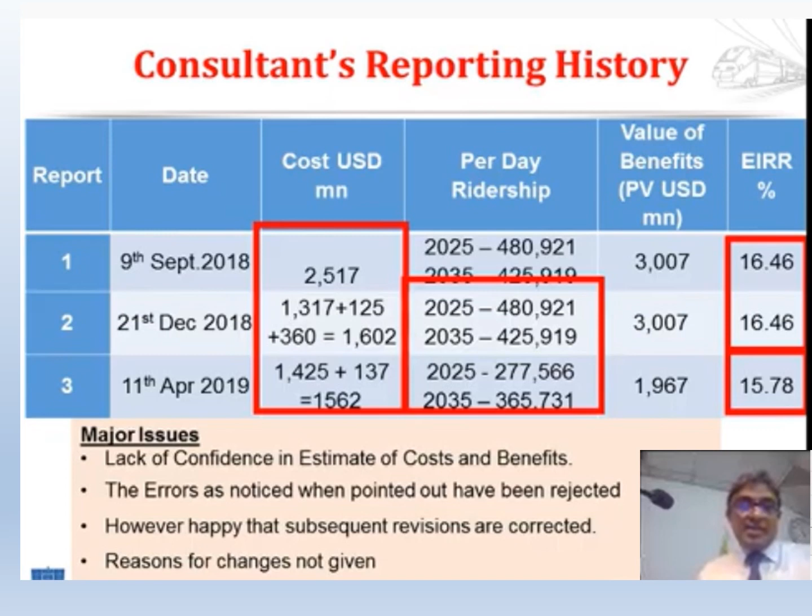The slides extracted from the PowerPoint presented at the seminar summarize the concerns by the IESL. First, they tried to show that there were 3 feasibility reports which kept on changing each time a question is asked. The speaker's intention was to show the misconduct by the consultants.

However, most of you who have been part of any projects or any study would know that the final report just doesn't come out at once. I have explained before the reasons for the 3 versions of the report and how it unfolded. These draft versions of the reports are usually produced in well-spaced time intervals, giving enough time for project units and the stakeholders to give their comments and to monitor the progress of the consultants.

First of all, there's only one official version of the feasibility report, approved by the ADB, PMU and the Ministry, and that is the report submitted on the 11th of April 2019.

Any of the other versions of the draft reports were only available for steering committee members, and reasons for any changes between the internal documents have been provided to the steering committee members.

It is unfortunate we are not speaking about the final report findings, but on the reasons for the numbers being changed in an internal document, and thereby making people confused. This is the very reason internal documents are not shared with the public.

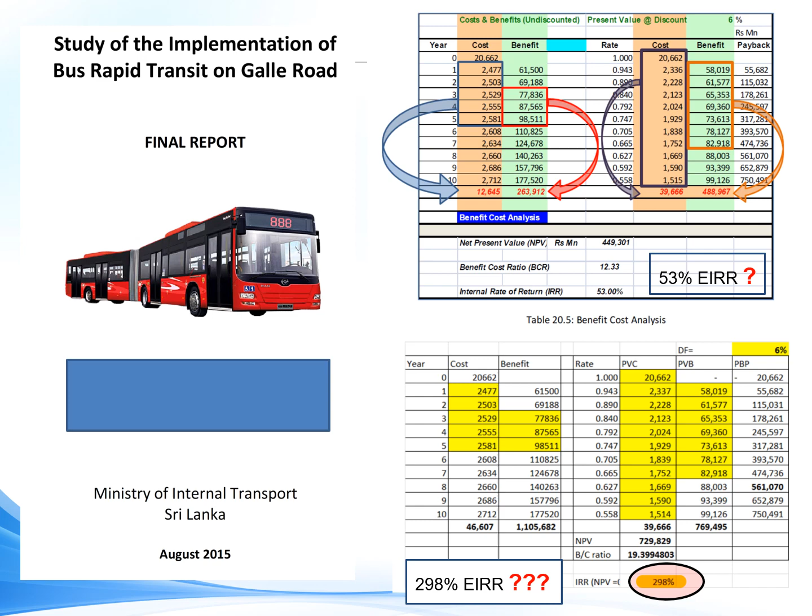It was disclosed that the estimated cost was 2.5 billion US dollars. As explained before, when ADB and PMU raised the question on cost being too high, the team leader explained that the cost was estimated based on international rates and he expects it to come down by 30 to 40% with detailed designs completed, and will be adjusted in the final report. He said this on 9th September 2018, the day the first draft report was submitted, not suddenly after one month or because of IESL's question, as misinterpreted by the presenter.

The cost was updated in the December 2018 report first, and finally in the final report on April 11, 2019. The estimated final cost was 1.4 billion US dollars, with a construction cost of 1.2 billion US dollars.

The reasons for the reduction, explained by the team leader, were twofold. First, it was due to refining of the initial cost, which was done based on international rates, using new local rates in detailed cost estimation, with optimization of structures like bridges, stations and track works, and due to change in rolling stock cost. Second, the previous cost was estimated in LKR and converted based on an exchange rate of 150 instead of 179.

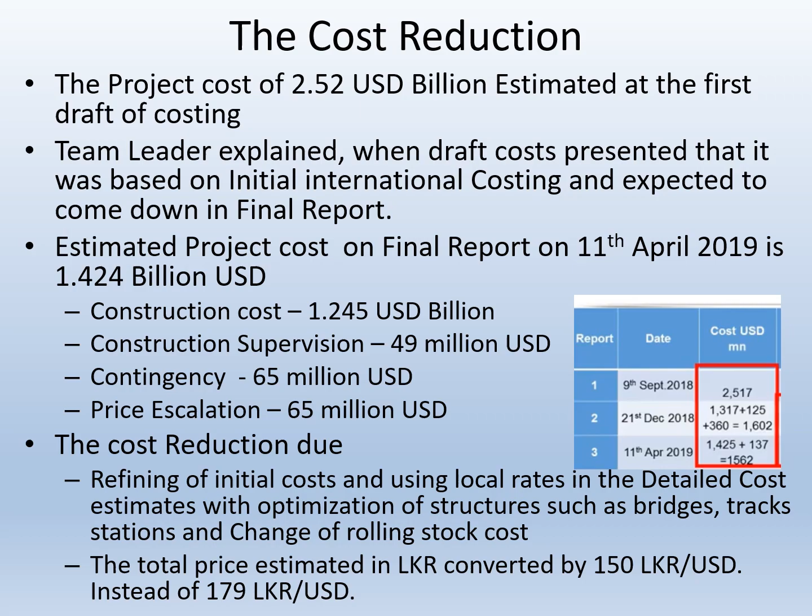So let's move on to the questions on demand analysis.

The presenter tries to show that the demand numbers have changed with no reasons given, and tries to add to the story as if the numbers are just made up. The basis for this accusation is that the demand numbers remain high in the so-called report 1 and report 2, and suddenly come down in report 3.

When we do the demand modeling, we don't do just one run. It goes through a thorough scientific process, and this is a technique that not many in Sri Lanka understand in depth, so I will explain it in detail a bit later.

Although we know what would happen now, what we don't know for sure is the future scenario. There can be many ifs and buts, and the demand numbers can change based on many combinations of assumptions you make. One such assumption is how you consider population growth for the future. A high growth will have more demand, and a medium growth in population will have lower demand. Later on, you would see that this change in demand numbers was based on such an assumption on the population growth assumed.

However, all these model scenarios are well documented in the feasibility report, and therefore there are only three reasons why the presenter says what he says: either he has not read the report, or he has not understood what is written in the report, or he does not understand modeling in general.

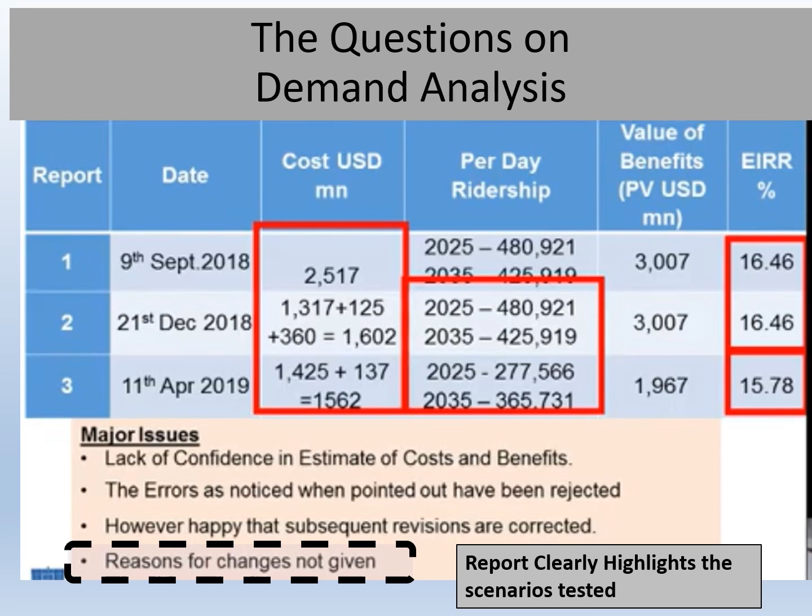The demand modeling designed for the rail demand depends on three key assumptions. The first is the operational assumption, which includes the fare, the frequency, the speed, access time to train, wait time, the facilities, etc., which can be considered fixed normally. The second assumption is how you consider the socioeconomic assumption, where you consider how your population and employment is expected to grow—that is, whether you consider a low, medium or high growth scenario.

The final and third assumption is what other projects will have an impact on the demand. The impact can sometimes be positive and sometimes negative. While the operational assumptions can be considered fixed, multiple combinations of socioeconomic growth and other projects will create the alternatives that you consider for your modeling.

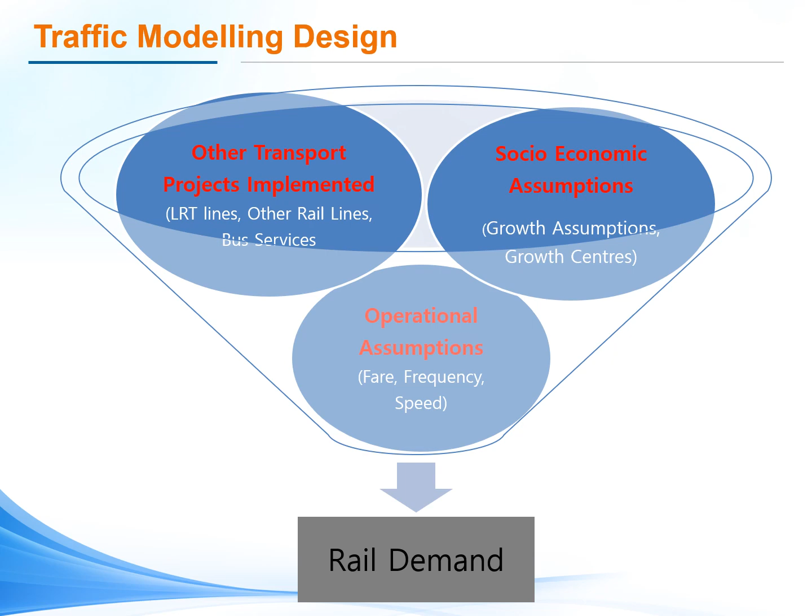There were two major development plans available during the study. The first was the Megapolis plan, which considered a high population growth scenario, growing from 5.8 million in 2013 to 9.1 million by 2035. The second was the CoMTrans plan, which assumed a medium growth scenario from 5.8 million in 2013 to 7.9 million by 2035. The study used both assumptions, considering Megapolis as the high growth scenario and CoMTrans as the medium growth scenario.

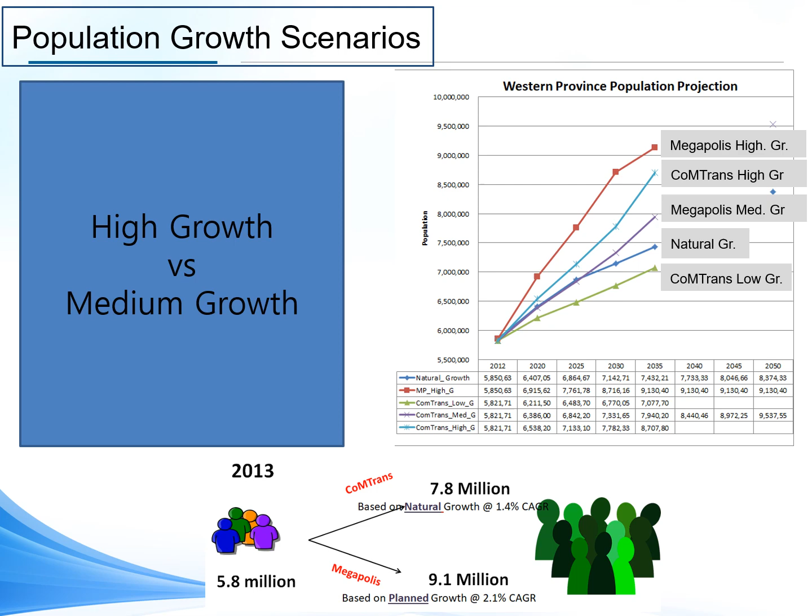These were the socioeconomic assumptions used in the study. Three alternate modeling scenarios were considered.

Scenario 1 was a high population growth scenario with moderate planned other public transport, considered the high growth Megapolis development scenario. Scenario 2 was still high population growth but with virtually no other public transport development, known as the high growth, less public transport development scenario. The final scenario considered a medium population growth scenario with the same public transport development as scenario 1. Although only 3 scenarios were reported in the final report, there were over 50 modeling scenarios considered in the study to look at impacts.

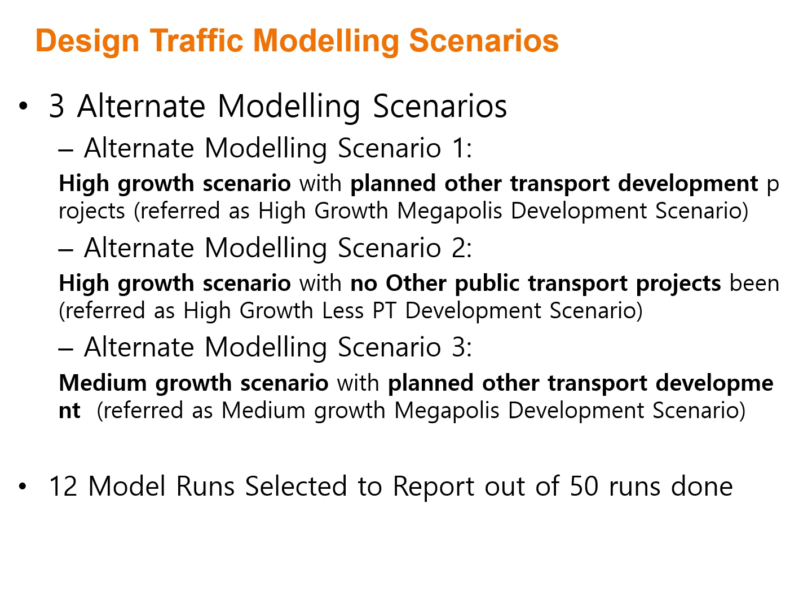The above modeling scenarios were tested using a modeling process that I will describe next. What we really want to understand is the number of people or passengers that will use the rail network or the road network.

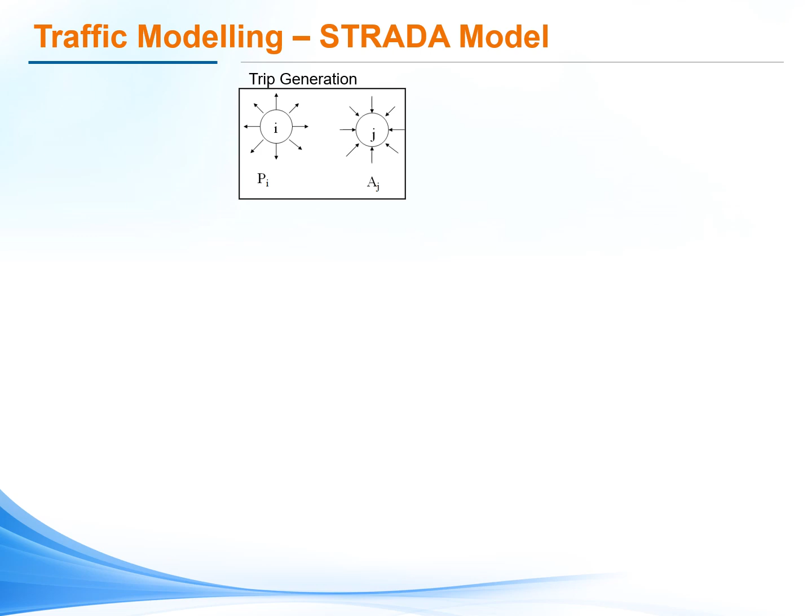The process used was called the 4-step method. The first step is trip generation, where we determine how many people will travel to and from a particular area. What we get is called a trip table. The inputs are socioeconomic information such as population, jobs, school children, etc.

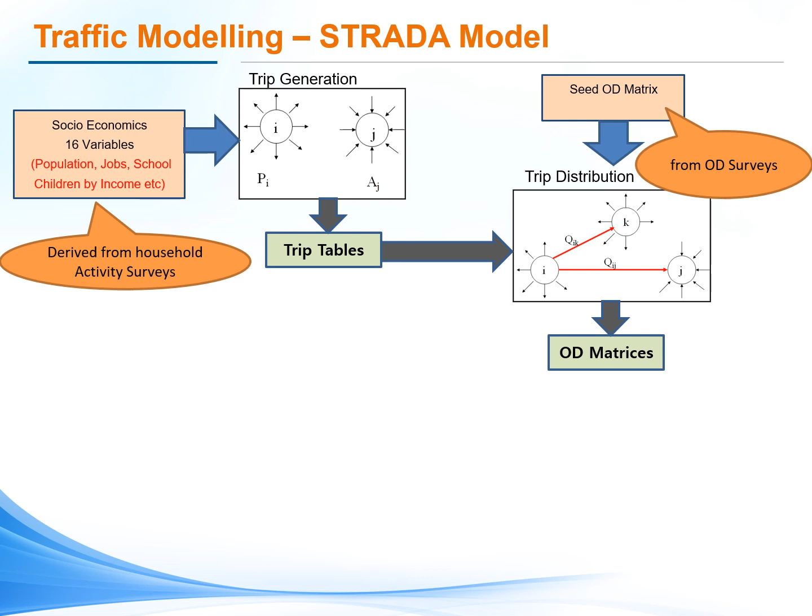The second step is trip distribution. Here we use the trip tables understood from the first step and determine where people are going to and from each area. We use previously done origin destination surveys, and the output is called the origin destination matrix.

The third step is mode choice, where we calculate how many people would choose a particular travel mode—whether car, motorcycle, bus, rail, or LRT—to go from origin to destination. This is where comparative analysis is done, where fare, travel time, access time, and frequency between each mode play a role, as people choose based on their perception. We use information from surveys on how people behave, breaking out one single OD into multiple ODs. This mode choice step is one of the most important steps of urban transport modeling, especially for a public transport study.

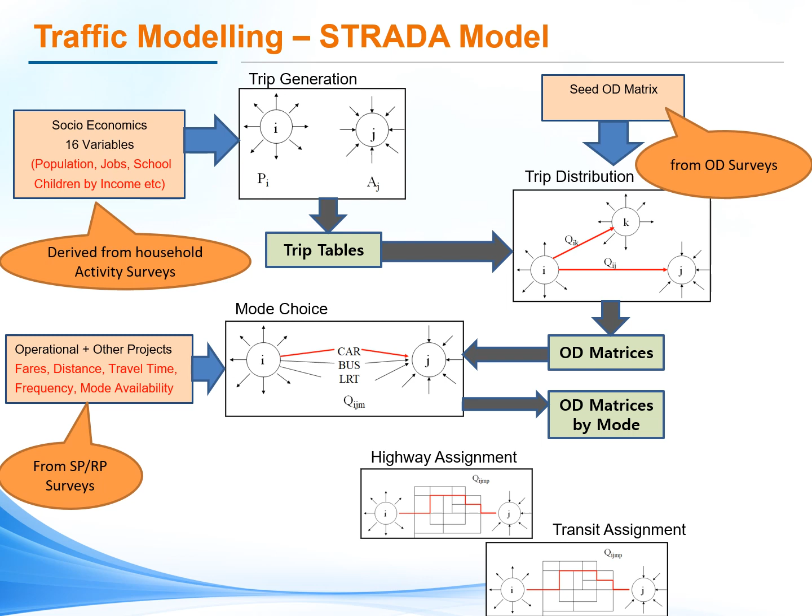The final step is called assignment, where people choose what route they will use. For road networks, we use highway assignment, and people choose which road or route. For public transport, we use transit assignment, where people choose between routes within a particular mode—for example, whether to use route A or route B for a bus. The output gives us how many private vehicles will go on a road and how many passengers will go on public transport. This step is circulated through mode choice in a couple of iterations.

For a known year, when we have information, we run the model and calibrate it so that what we know is produced by the model—that is what we call calibration. Then we run the scenarios for the future to understand what we don't know.

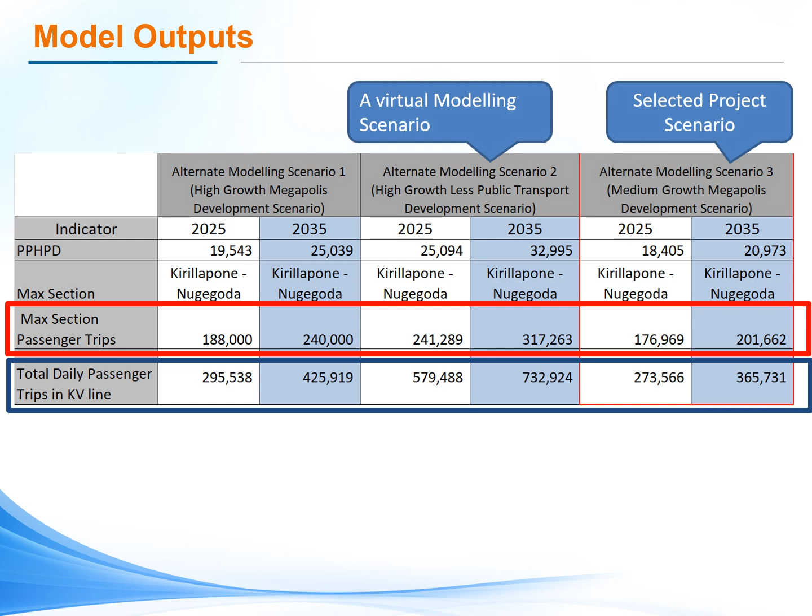This table shows the summary of passenger demands for the 3 alternatives considered, including total passenger trips at the maximum section and total passenger demand in the system. Initially, we considered the high growth scenario and reported that as the project scenario, since Megapolis was the government plan and therefore had a higher demand as expected. But later, based on discussions with the ADB and the PMU, we decided it was more appropriate to use the medium growth scenario rather than the high growth scenario. That is the reason for the change in demand numbers, and why the demand numbers have gone down.

For example, what was reported as 188,000 in 2025 at the maximum passenger section had gone down to 177,000. What was reported as 240,000 in 2035 had gone down to 202,000. Similarly, total passengers in the whole KV line network went down—for 2035, from 426,000 passengers totally to 366,000 passengers. This explanation has been given to the presenter and to the whole group many times.

So why they keep saying the reasons have not been given, over and over again, is a big question to me.

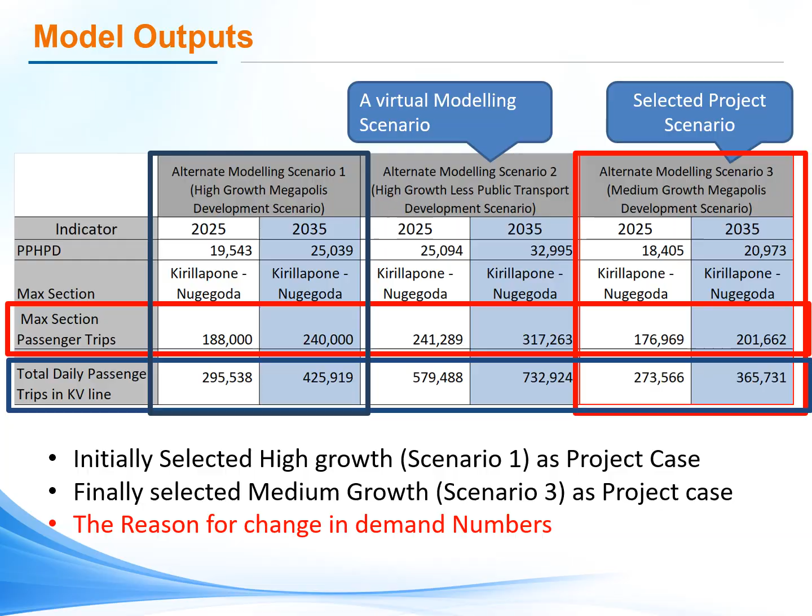There are two separate demand numbers which people sometimes get confused with. One is called the sectional volume and the other is called the total daily passenger trips. The sectional volume is the total number of passenger trips in a particular section. Usually we are interested in the section that has the maximum number of passengers, which is used for planning purposes.

In this case, in the KV line, the section that has the maximum number of passengers was the Kirillapone-Nugegoda section. This number is used to calculate the passengers per hour per direction, technically called the PPHPD. This determines how many passengers we need to carry during a peak time period, which in turn decides how many trains per hour we will have to send. Therefore, this is an important number.

However, this section does not include all the passengers in the system. For example, passengers having an origin and destination between Fort and Borella, Fort and Narahenpita, Borella and Kirillapone, and Homagama and Nugegoda do not get counted in this maximum section between Kirillapone and Nugegoda. So it is important to know that the total daily passenger trips is different from the sectional volumes. The total passenger trip is the aggregation of all passenger trips between all stations, counting even short trips. Therefore, the total passenger trip number has to always be higher than the maximum sectional volume.

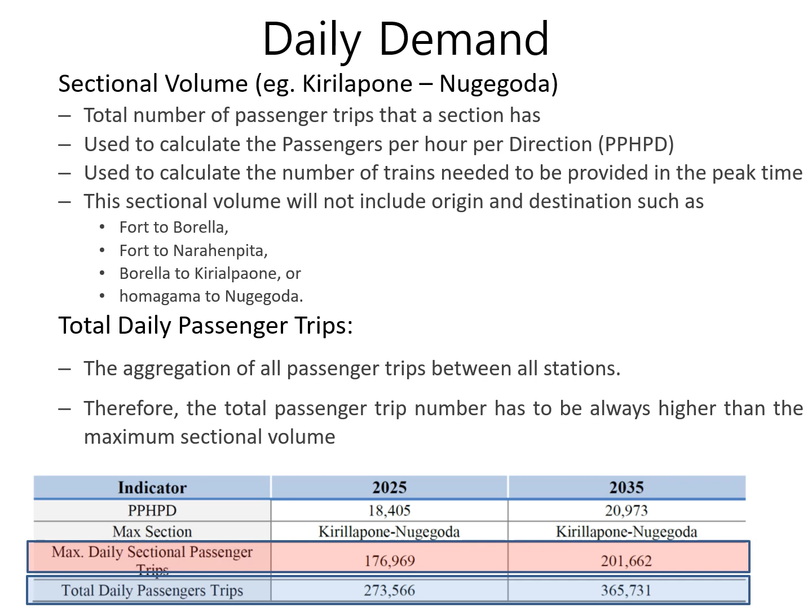For this design, we used the maximum section value in year 2025 of 177,000 with a PPHPD of 18,400, and for year 2035 it was 201,662 with a PPHPD of 20,973. The total passengers in the KV line system was estimated as 274,000 in year 2025 and 366,000 in year 2035. This is very common for people who might not have knowledge of modeling to get confused with this definition and mix these numbers.

However, he conveniently avoids showing the total passenger number he gets. This is understandable, as this is the hardest calculation to do manually, going through a 476 by 476 matrix. If you really don't know what the model is doing, it will be very hard to show it. Knowing the people who do the work for him, and knowing they don't get any guidance, it is understandable that they have omitted this number.

The presenter tries to mislead people that the same model is being used, and goes on to say that if two engineers use the same software, the same model and the same input, they should get the same results. You need to understand that the model is a process, and the process is enacted inside the software. Therefore, the model and the software are two clear components. The software used by both maybe is called the STRADA software.

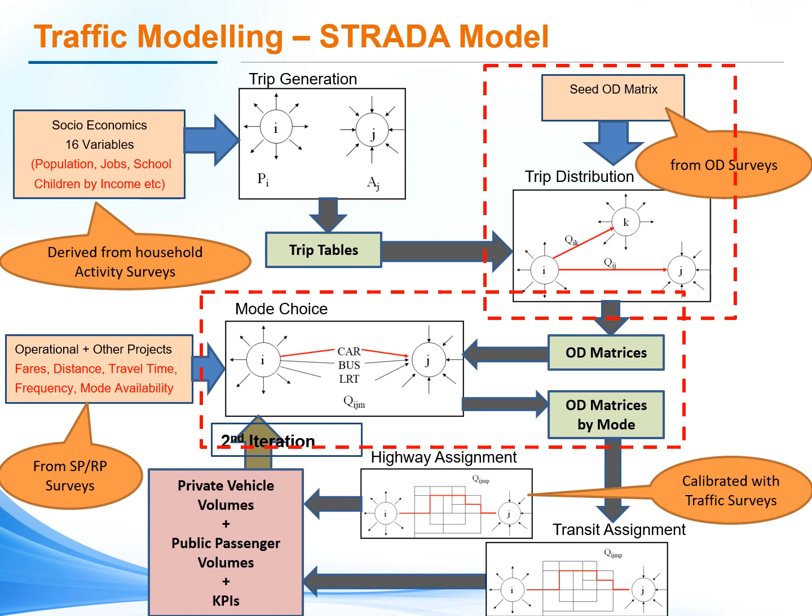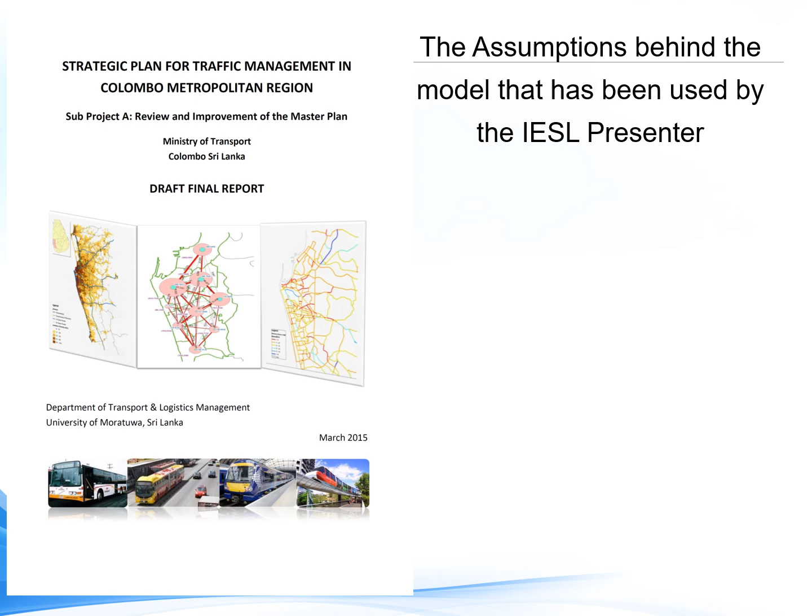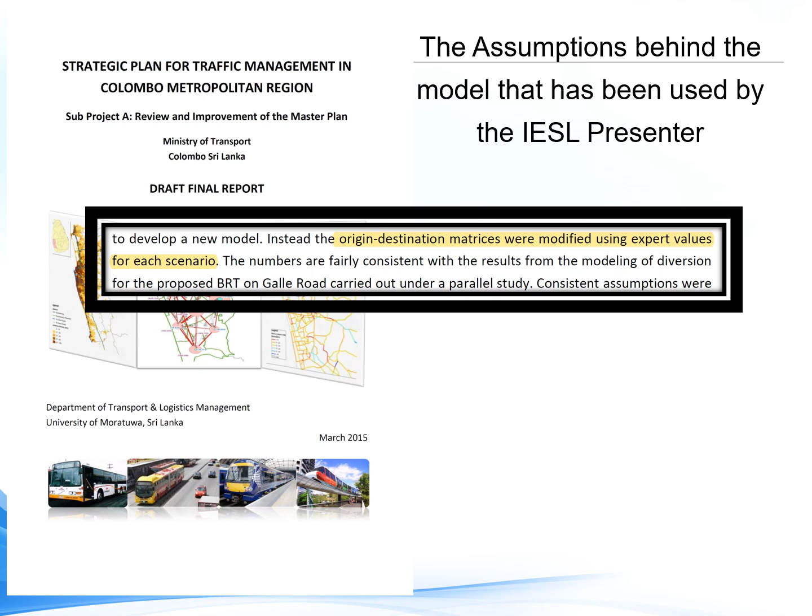What I will show you next is how the presenter has considered the approach, based on the documentation of his work. You can go through this document where the assumptions in the process he uses are documented. First of all, the OD tables are modified based on expert value, and not based on population or employment change. This is one of the hard-coded assumptions being made.

Secondly, the mode choice component, which is very important in a public transport study, is omitted, saying a cube software was not available and due to limited time of the study. Mind you, this study in question took over one year, the study done by this presenter. And also, when we did the mode choice, we didn't need this cube software, but only needed the knowledge of mode choice modeling, and that is what we used.

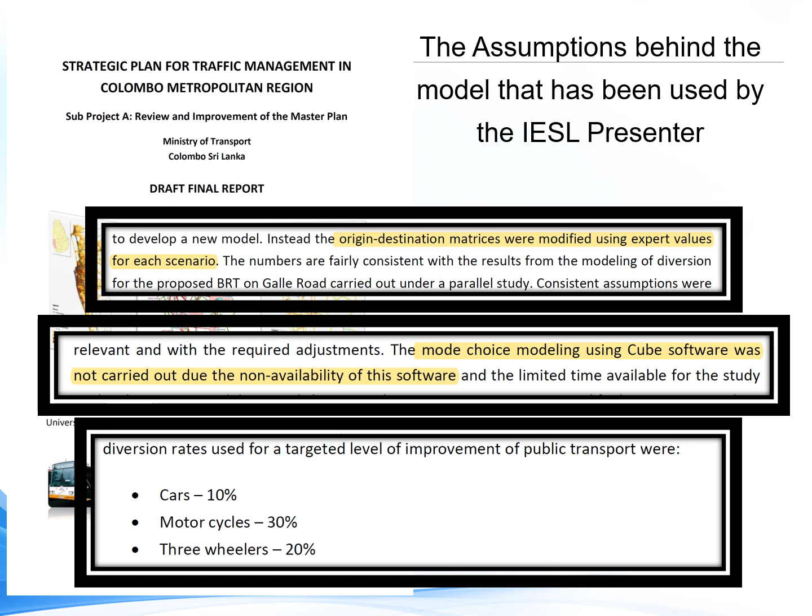So let's look at what assumptions they have used, and what was shown before was the excuses given for not using. The assumption used is to hard code the numbers—when developing a public transport system, if making a bus lane or BRT, or a railway line, what was assumed was that 10% of car users, 30% of motorcyclists, and 20% of three-wheeler passengers will change to that particular public transport. So this is a very hard-coded assumption.

This can actually lead to writing the answers you want. In other words, if you want more demand, you can increase this share by a certain number, and if you want a lower number, you can decrease the share. So these are numbers he uses that are not sensitive to any changes in fare, frequency, travel time, or even other particular projects happening around.

So it's very clear why we get an EIRR of 298% before, as discussed, because these are based on hard-coded assumptions. So bottom line is, I really don't expect that even if he uses the same inputs, he will ever get my results, considering that he and I use clearly two different processes in modeling.

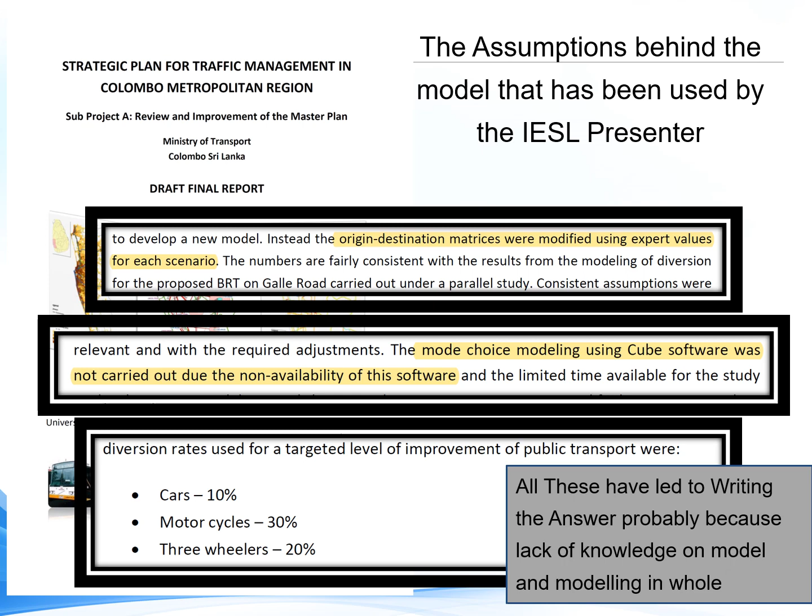The flawed process described to you was applied in the work presented in this report, which is the transport master plan made by the same presenter. Recently, we have seen that he is on a roll to promote back this same plan, citing COVID as an excuse. Therefore, we should really take note of these flaws in analysis and should at least review through an independent body if we are even to consider anything from it.

Now let's check whether the numbers presented by him really make any sense. He states that he gets 196,998 for the maximum section between Kirulapana and Nugegoda, and that is a share of 30% for the rail from the total corridor. This is extracted from his own slides.

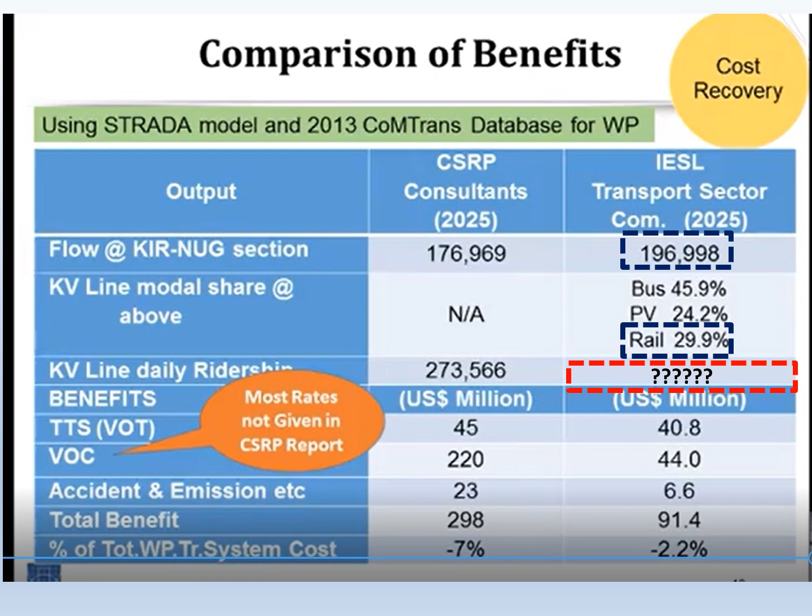And if 196,998 is 30% of the total corridor volume, then the total corridor passengers, that is 100%, is 657,000. I hope you agree with me. He estimates the total number of passengers passing Kirulapana by car, by bus, by train, and all other modes will be 657,000 by year 2025, not 2035.

The number we surveyed in 2012 is 175,000. So what he's saying is there is 11% growth per annum for all the trips happening. What we estimated for the year 2035 in the medium growth scenario was 354,000, and even for the high growth scenario, it was 419,600.

But the same presenter made a big fuss when we had met in previous meetings, saying that our demand estimations are very high and overestimated. And here he goes and estimates a total corridor demand of 657,000 for the year 2025, which is even higher than the high growth scenario we estimated for the year 2035.

So there's something terribly wrong here with his estimations, and we wanted to check whether we had made a mistake, so we requested him to provide his calculations and model by officially writing to the university, since the model he has been using was provided to the university by the Ministry of Transport for a previous project he had done. But unfortunately, he has been avoiding providing the information, and he replied saying that this work was done as private work for IESL and not as part of the university. So that is again a questionable thing.

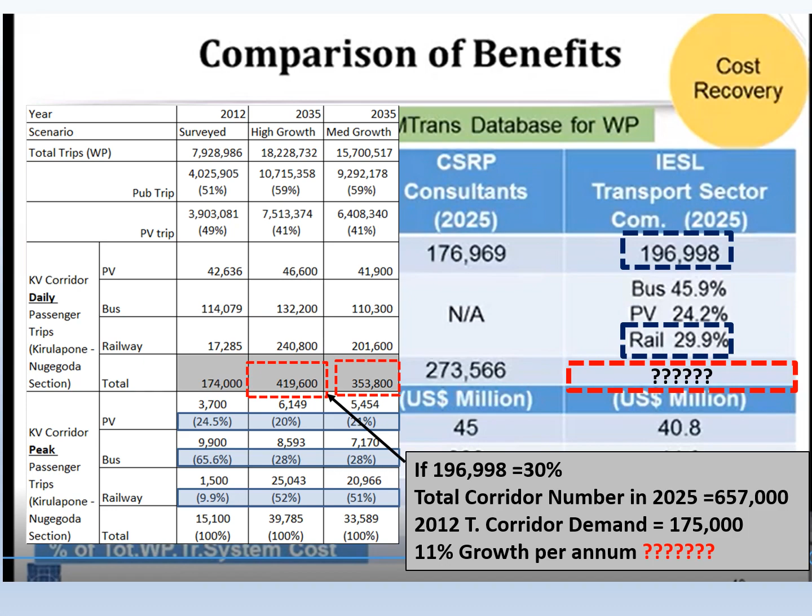Even though the current KV line is carrying 30,000 passengers right now, keep in mind you can't compare the projected numbers against what it's carrying right now, because currently it is a single track with only 8 trains running in the morning peak and 8 trains in the evening peak, with only 3 trains running in the peak time. This is a substandard system with a substandard signal system, 40 years old, poor quality service and infrastructure. You are comparing this 30,000 demand against a system where we would expect to run almost 12 trains per hour, and by giving the necessary boost, what the model shows is that passengers will come in big numbers.

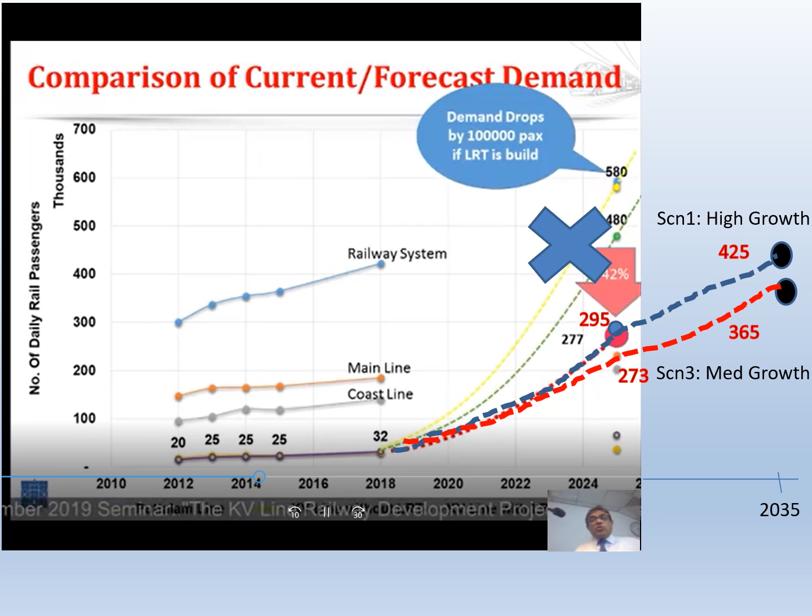Let's move on to the vertical alignment. The argument put forward by the Transport Committee of IESL was that the track should not be elevated from Maradana to Malapalla as proposed by the consultants. Instead, they proposed elevation of 4 sections, basically elevation over 6 roads, to a length of 6 kilometers.

The seminar was when we also saw this proposal first. But no details, no calculations, nor the basis for the proposed alternative design is known to this very day. I'm sure if you ask even today, you will not get any answer. However, our team of engineers, mainly local experts with railway engineering knowledge, along with the consultants' team, went on and reviewed the sections they proposed to elevate.

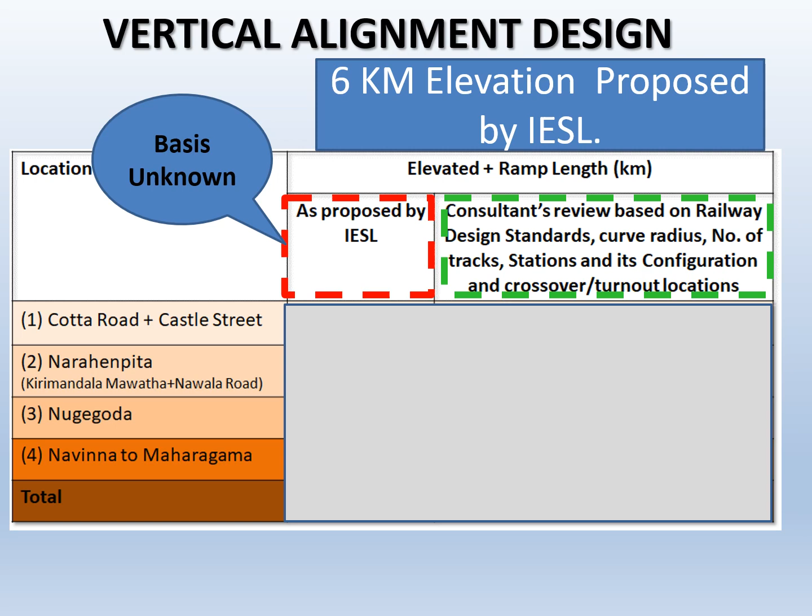The consultant looked in detail based on design standards, curve radius, the track, station location, and other factors such as crossovers, etc. The main question we had when reviewing was to check whether their proposal was technically correct or practical. We expected, coming from a group of chartered engineers, some being railway engineers themselves, that they would have a sound basis for their claims.

To estimate a distance of elevation, you need to know at least 2 parameters: the clear height of the elevated section and the ramp gradient. These are essential. So we asked this whole group, at one of our one-to-one meetings at the Finance Ministry, for their assumptions. Unfortunately, they had no idea and no answer, even that it was needed. Their reply was that they had not looked into them in this detail.

So later you will find that they had not even considered a clear height, and their ramp gradient is a whopping 3%. We all know that you need to provide at least 10 meters clear height at elevated sections, and the gradient cannot be more than 1 to 1.5% for railways. Sad, isn't it? I will walk you through why their proposal of 6 kilometers is practically impossible and technically incorrect.

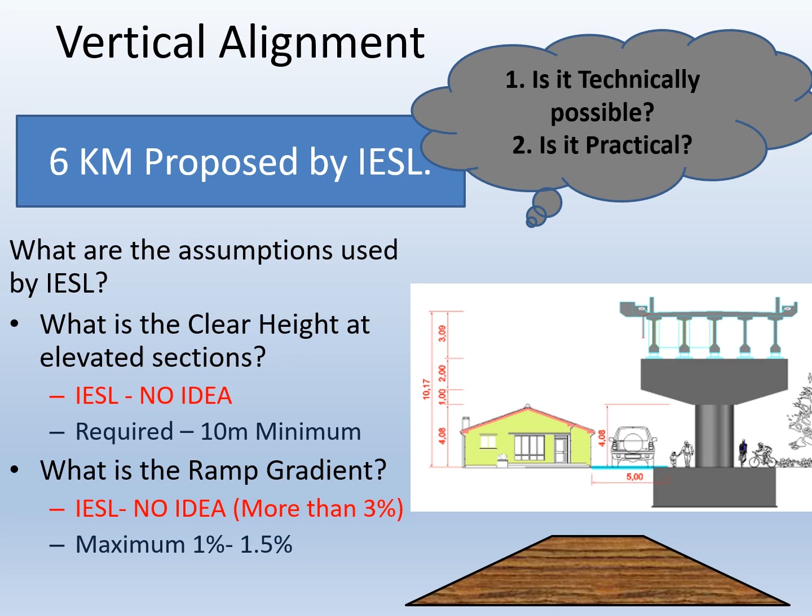Let's start with the Cotta Road section, where they propose a 1.15 kilometer elevated section. This elevated section comprises 340 meters of total elevation, a 400 meter up ramp, and a 340 meter down ramp. First, we found out that they had considered elevating only based on clearing the roads.

But because the location is close to a station, the elevated section had to be 767 meters instead, to include crossovers and curvatures. Then, we found that the ramp length was based on a 3% gradient, which a railway cannot run on. Therefore, the ramp lengths they had considered were too short.

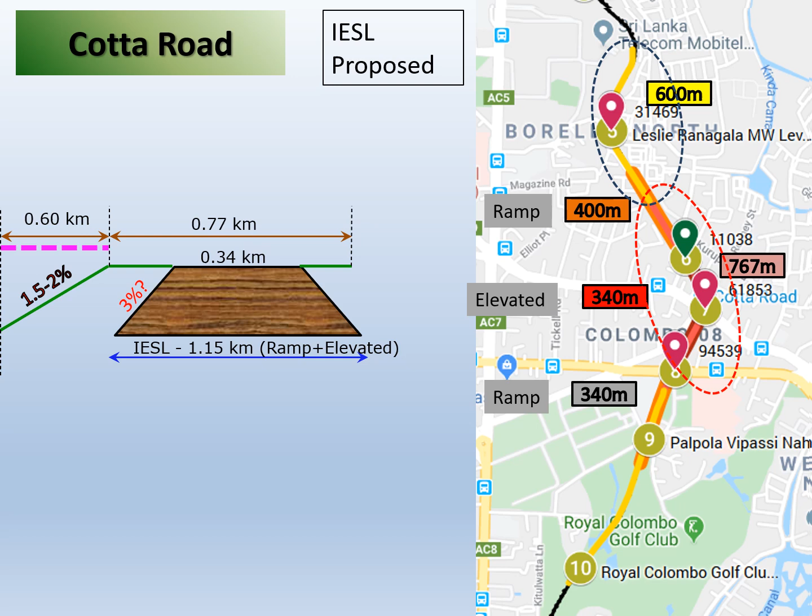Therefore, the up ramp should be 600 meters instead of 400 meters, and the down ramp should be 770 meters instead of the 340 meters considered. So the assumed 1.15 kilometer elevated length is technically not possible. Instead, a 2.15 kilometer length is needed. And this also created a further problem, because the down ramp came right in the middle of the golf course.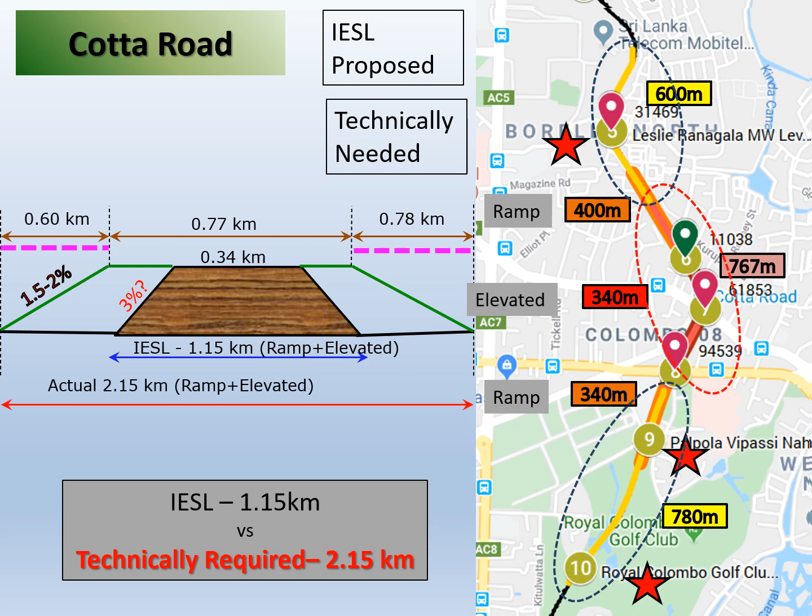Also, two other locations, Leslie Ranagala Mawatha and the Palpola Vipassi Mawatha, have to be closed in this case because the ramp section is halfway across this road, so vehicles cannot pass through these roads at the ramp sections.

At Narahenpita, it's a similar story. They had considered the ramp gradient high, and instead of 1.43 kilometers they have assumed, you required 1.83 kilometers to be technically sound.

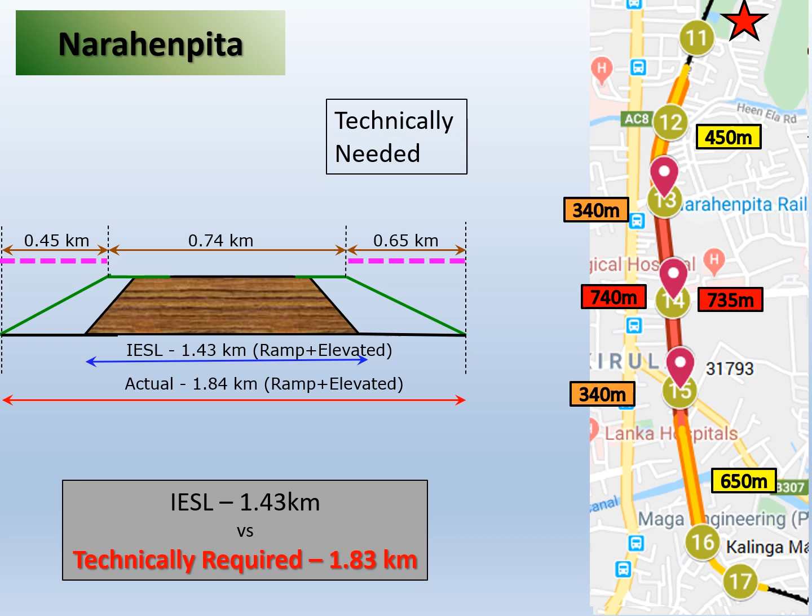At Nugegoda also, it's a very similar story. What they had proposed was to use 340 meters of length as total elevated section, with a 400 meter and a 320 meter ramp length. Once again, there's a station at this section, and being at a curve section, the length of elevated section required is 780 meters instead.

And it also required longer ramp length because they have considered the 3% gradient, and also because of the geometry and being at a curved section. So therefore, instead of 0.98 kilometers, technically you require 2.69 kilometers.

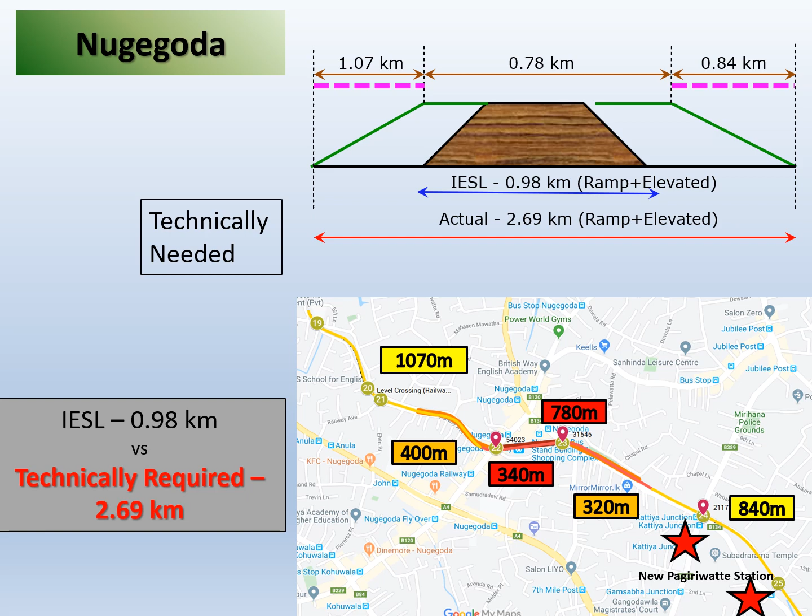And it also brought further problems with the down ramp coming right in the middle of the Mirihana road, which is one of the widely used roads at the moment.

And the section between Nawinna and Maharagama, so they have got the elevated length correctly here of 1.6 kilometers, but the ramp section is too short. So instead of 2.44 kilometers that they have proposed, technically you require 4.4 kilometers.

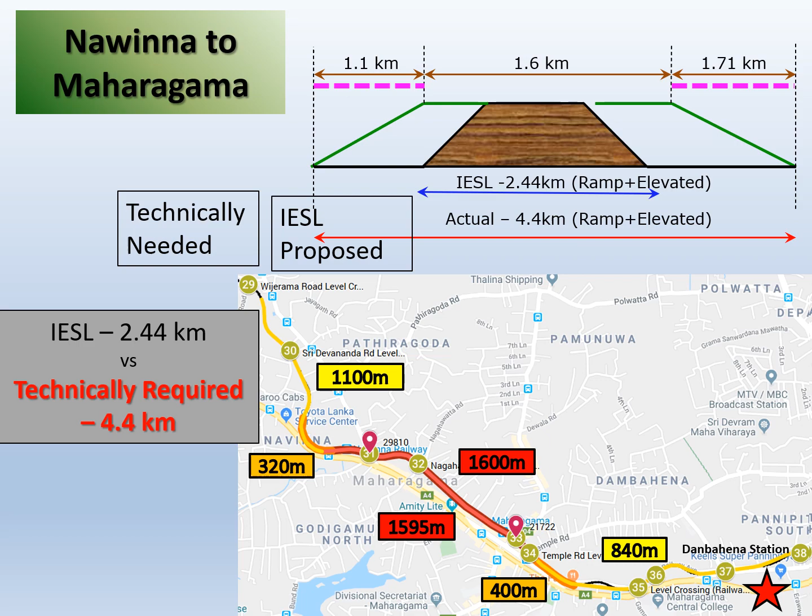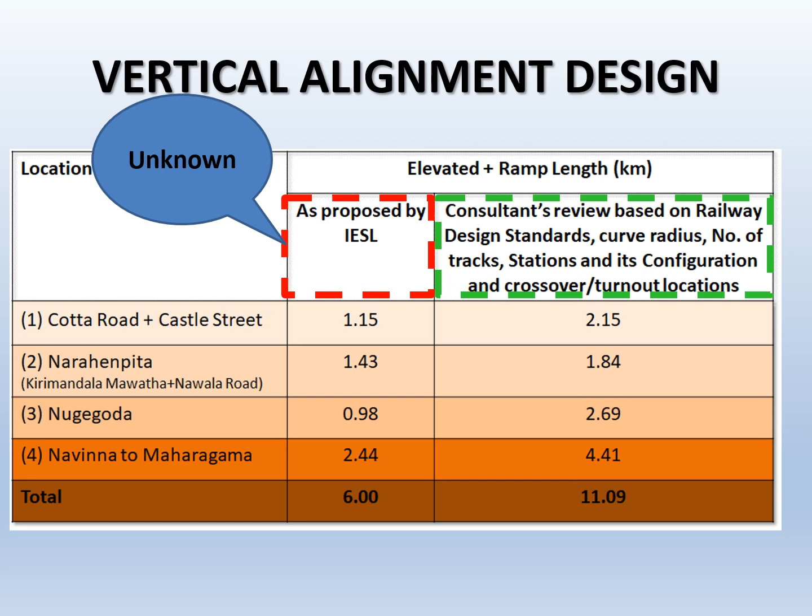So when you summarize what they have told and our review, we find instead of 6 kilometers proposed to elevate these 4 sections, you will technically require 11 kilometers of elevation. So therefore we can conclude their proposed 6 kilometer track elevation is practically and technically incorrect.

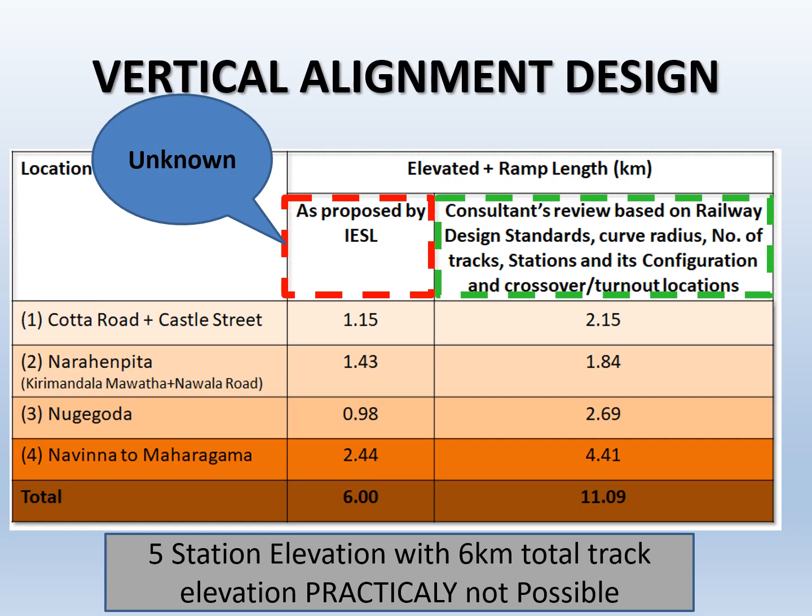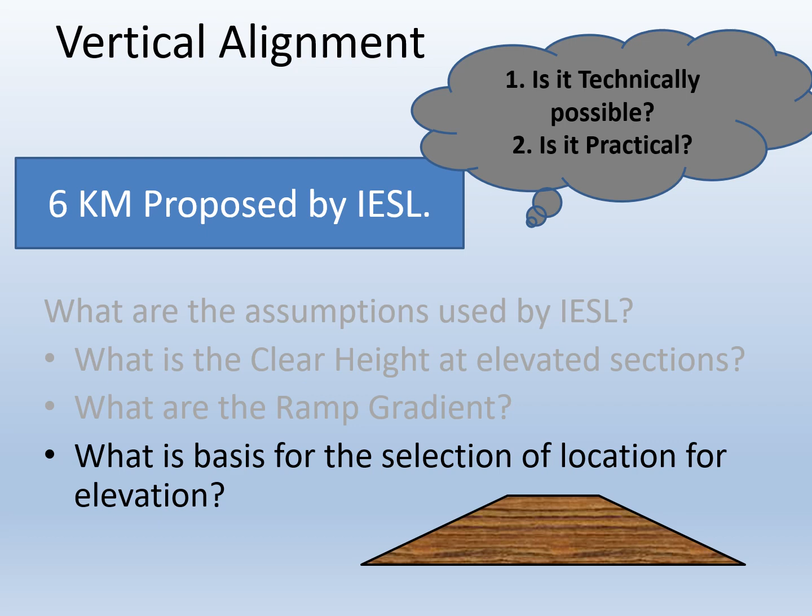We then tried to understand what is the basis for them to propose these sections, or why they have selected these roads to be grade separated. The question we had was whether the selection was based on the road traffic.

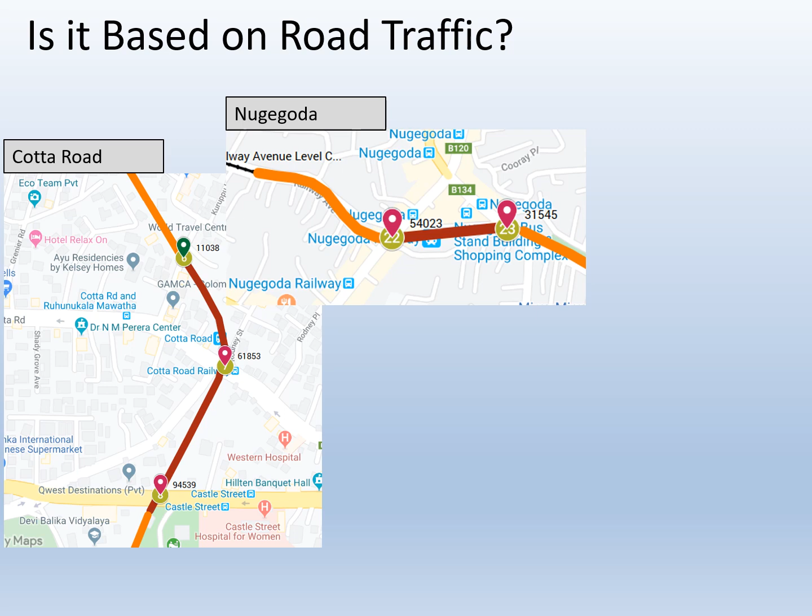So we look at the 4 sections separately and review the ADT of the daily traffic of all the roads that they have proposed to grade separate. You could see that they had recommended to elevate the Ruhunukala road at the Cotta Road section having 11,000 vehicles per day, and also on the Narahenpita section, they have recommended to elevate at Dabare Mawatha and Kirimandala Mawatha having close to 23,000 and 21,000 daily traffic.

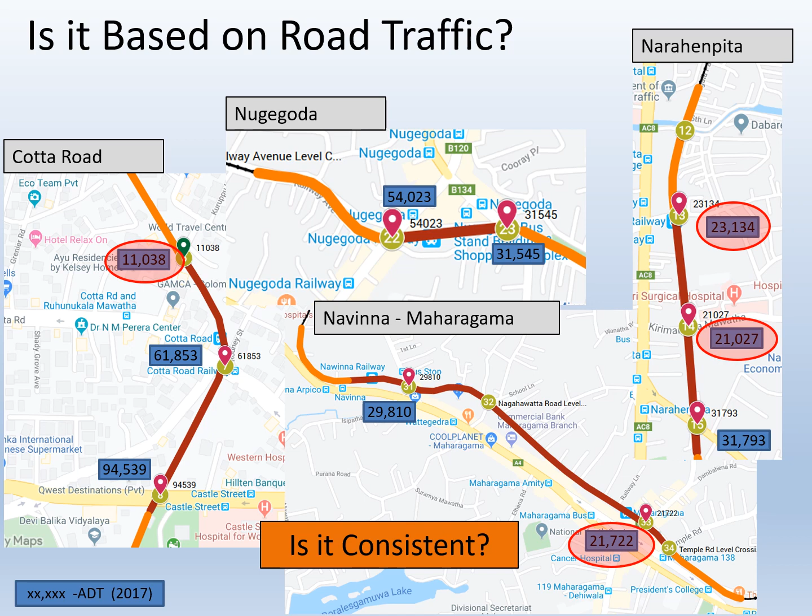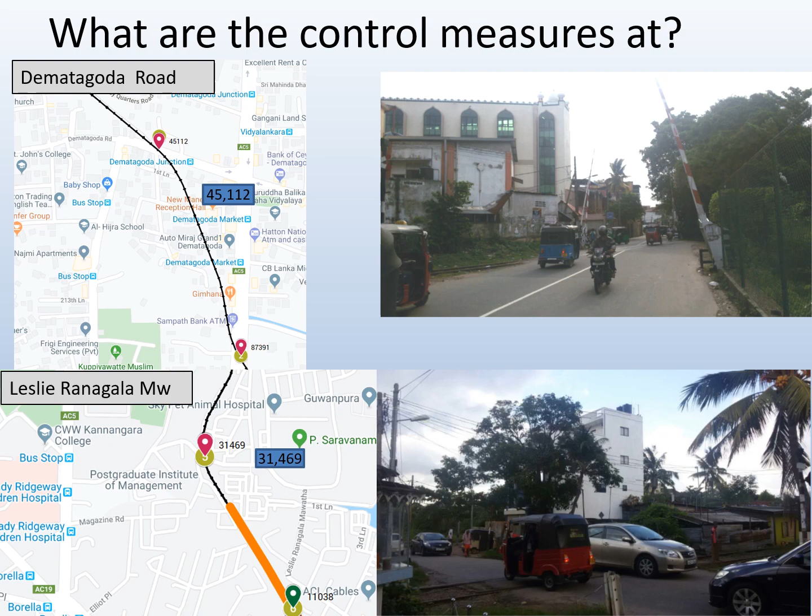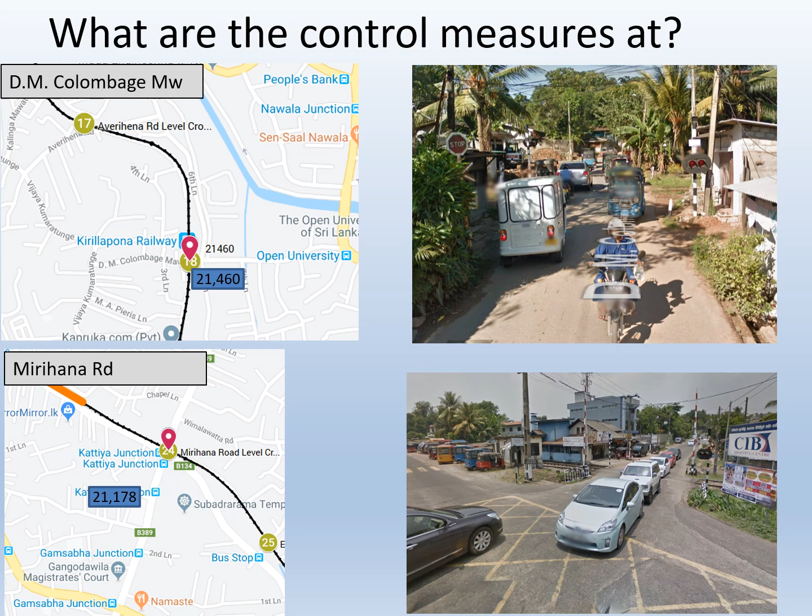But we could not find any consistency since there were many more roads having more daily traffic that they have not recommended to elevate. For example, Dematagoda Road having more than 45,000 vehicles, Leslie Ranagala Mawatha having 31,500 vehicles, DM Colombage Mawatha having more than 21,000 vehicles, Mirihana Road having 21,000 vehicles, Pannipitiya Malabe Road having more than 17,500 vehicles, Kottawa Athurugiriya Road having close to 30,000 vehicles were not suggested to be elevated.

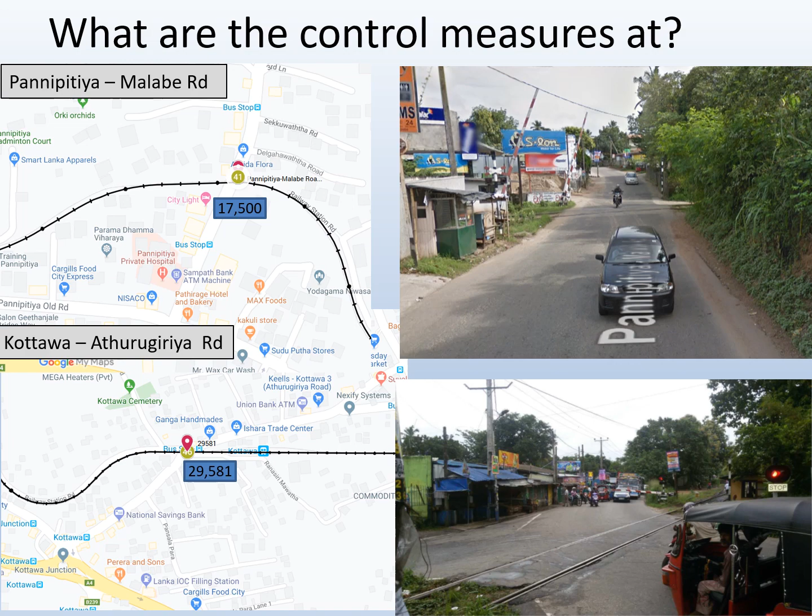So we didn't know what their proposal was. Are they suggesting to control it by gates? And the more we tried to find a scientific reason, the more we found out that these suggestions were all based on their opinion, not based on scientific reasoning.

Now I will explain to you what we considered when we decided on elevation. First, we considered that there are 148 railway crossings from Maradana to Avissawella, and out of that, 75 crossings were up to Padukka, and there were 56 railway crossings up to Homagama, with 20 major crossings that had more than 12,000 vehicles per day surveyed in 2017.

And we also did a scientific approach to evaluate the delays at major road crossings that will be presented to you later on. And we also considered that some of the roads where the railway crossings are close to the main road, such as Kirimandala Mawatha, Narahenpita, Dabare Mawatha, Mirihana Road, etc., will not allow elevating the road as an option.

We also considered the additional benefit of utilizing the space underneath the elevated structure, using it as walking paths, cycling paths, public space, and revenue-generating commercial activities.

We also considered the impact of community separation, because when you have electrification, you will have to fence the whole track. So when you're going on ground, you will have to fence along the whole total length, so the whole community will be separated. So we have considered that impact.

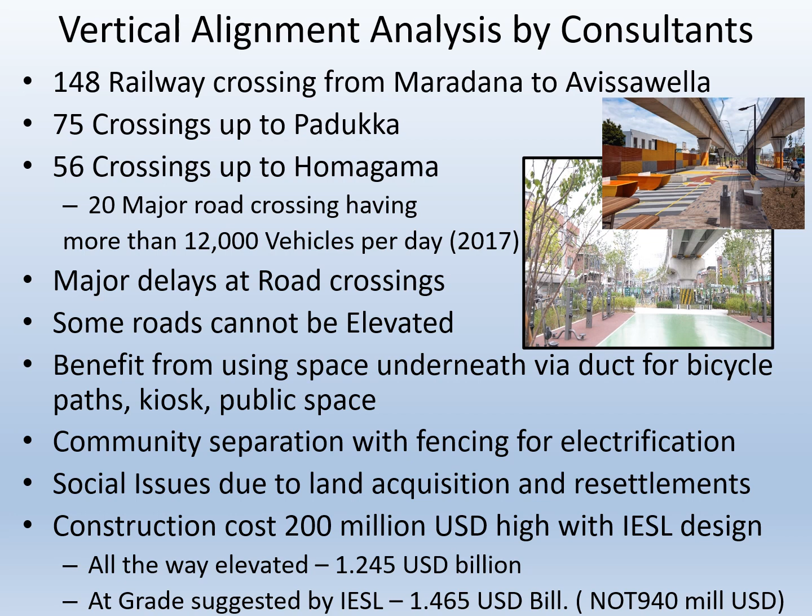And finally, we considered that, although IESL says that their proposal of going at ground with a 6 kilometer elevation is only going to cost 940 million US dollars, we have found that when we consider their proposal with technically correct design and safety factors, it will be a construction cost of 1.4 billion, not 940 million. This is 200 million US dollars more than the construction cost of the elevated option. So their proposal is even higher than going elevated.

There are other issues that will be created by going at grade across a highly urbanized area.

Going at grade will require a higher right of way. That is, the right of way required going at grade will be 14.2 meters, while when going elevated, the right of way is 12.5 meters. At the moment, we have a right of way of 6.5 meters, so this additional 2 meters needed extra due to going at grade will create more problems.

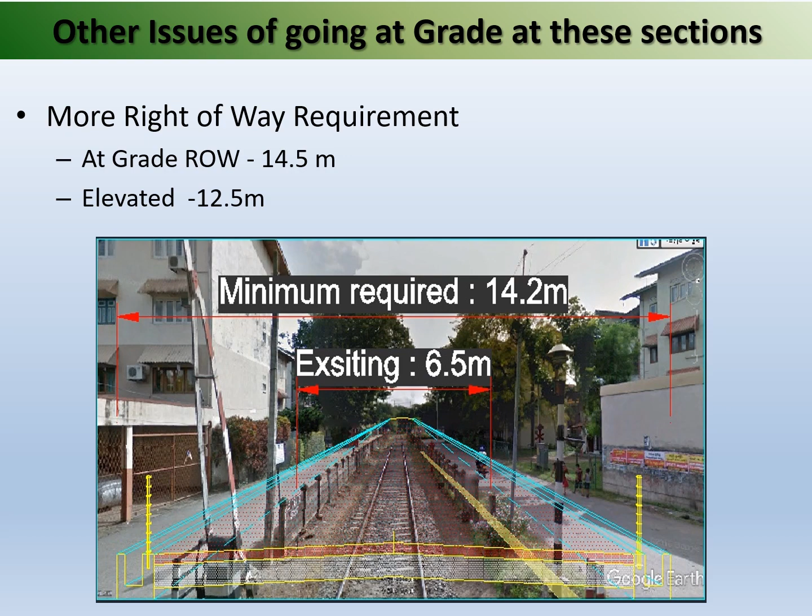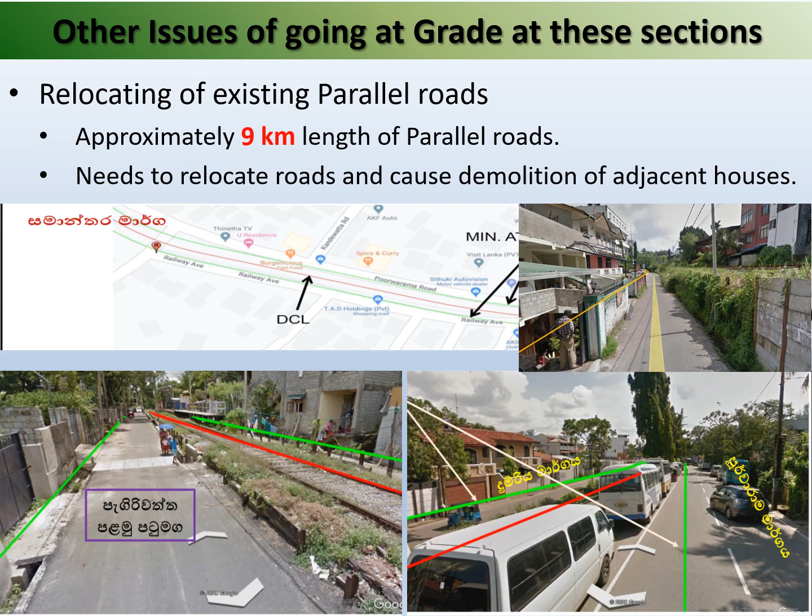One problem is when we go at grade, 9 kilometers of parallel roads such as Pangiriwatta Road, Poorwarama Road, and the famous Railway Avenue will have to be acquired to the right of way. All the houses that have access to their homes through these roads will not have an alternate access, and thus we will have to acquire and resettle them as well. Therefore, 9 kilometers of such roads will have this kind of impact.

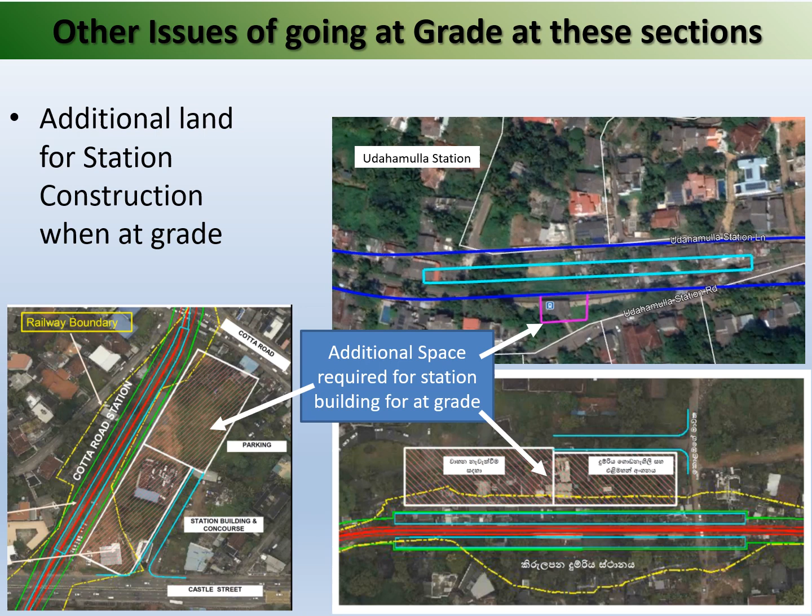Another problem is with the current design, the station is elevated above the track with ground level available for parking, drop-off, and bus touch-and-go areas. But with the at-grade option, you will need additional space for station and parking, as shown in this picture.

Now getting back to the scientific approach we used to evaluate the impact due to grade closures, we used two methods. One was based on vehicle flow and the other was based on the UN criteria for train vehicle units. For the vehicle flow method, we used micro-simulation software to simulate what will happen to the road network when a train passes and the gate is closed.

We varied the train frequency and the traffic flow to see the impact. The model was calibrated using information at baseline, where at present the gate is closed for between 2 to 3 minutes each time a train passes, and that is with a single track.

The current queue length at the peak time flow rate was about 440 meters, and this is with a per-lane flow rate of 1300 vehicles per lane.

We simulated the future gate closures with 2 minutes, considering the gate will have to be closed on average when trains are operating in both directions at high frequency.

We found that at the current traffic rate, the queue length will be about 625 meters when trains are operating at 10-minute intervals. If we go to a higher frequency of 5 minutes, the queue length will be about 825 meters. And when you consider future traffic flow, this will increase to more than 1 kilometer queue length when trains are operating at 5-minute frequency.

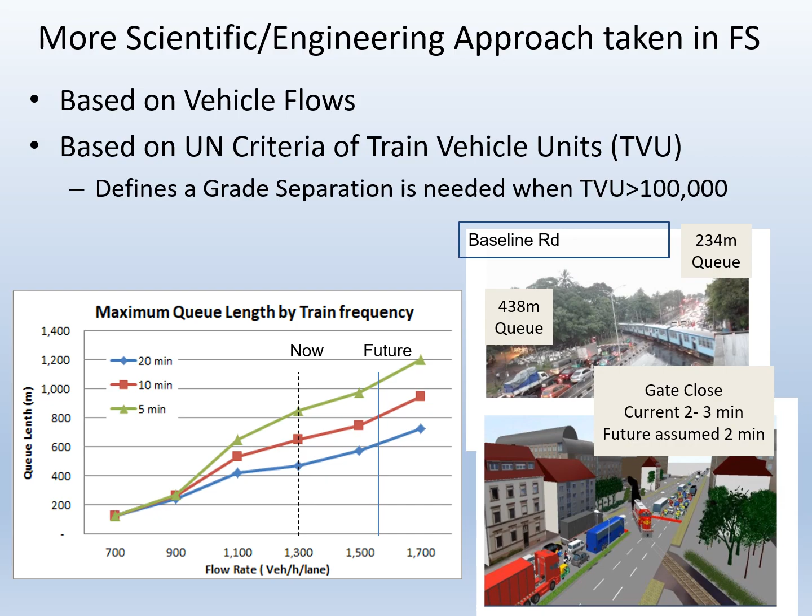We surveyed each location of the road crossings and checked each location based on the observed ADT surveyed in 2017, and calculated the peak hour flow, because the peak hour flow is the most important when looking at the rail-road conflict. Then we calculated the flow per lane at that peak time.

Based on that, we found each of the locations up to Malapalla will need grade separation, which means either rail elevation or road elevation. When you consider that all the locations continuously need elevation, it makes sense to elevate the railway.

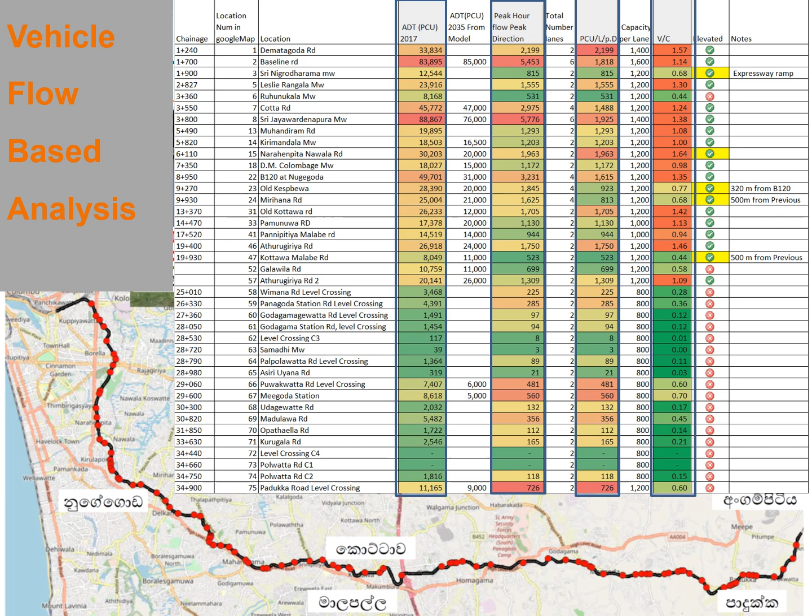The second method was to use the UN criteria of train vehicle units, or TVU, where the criteria was: if it is more than 100,000, these locations had to be grade separated. Based on that calculation as well, what we found is that up to Malapalla, grade separation was required. So you can see that we have used multiple criteria and consistent methods for our recommendation, unlike the ad hoc way proposed by the Transport Committee of the IESL.

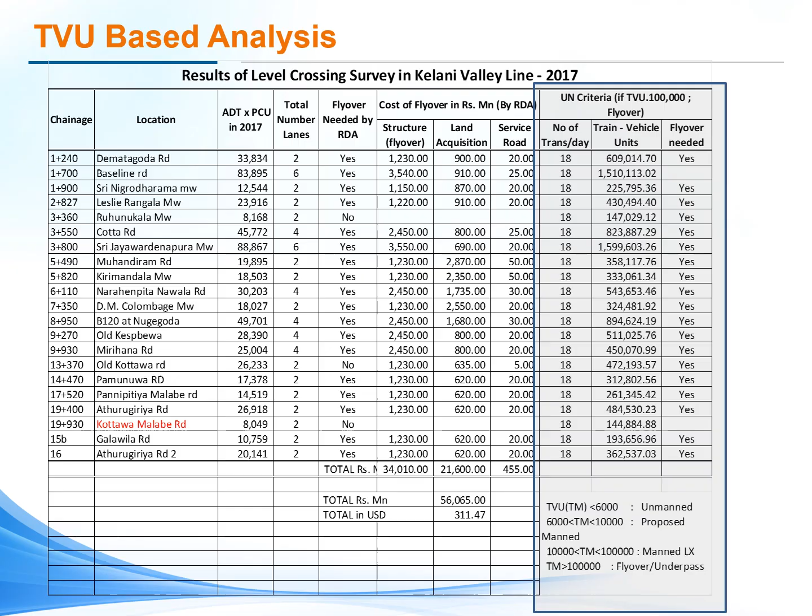Recently, I have heard about concerns raised by the group that elevation will increase the total time of a passenger, since they have to walk 7 meters high and come down 7 meters. There are also comments that a person carrying a coconut or a pole mallet will have to climb stairs with elevation. What I want to show is that at present, passengers already climb 7 meters up and 7 meters down to get across to the platform.

They do it with overhead bridges, and this is very common in railway stations. So the people who make these arguments maybe don't know that railway stations already have these kinds of passenger overhead bridges. The model considers the overall access time and wait time in its analysis.

The argument from the group gets funnier each time. According to the argument, no one should build other than single-story houses, or work in multi-story buildings, since the time now increases by going downstairs or going to their offices which are multi-story. So I really find this very humorous.

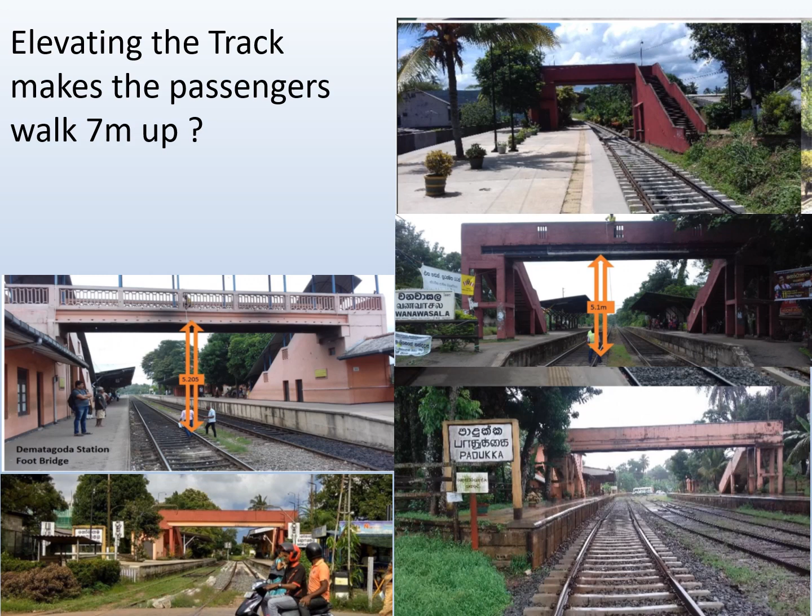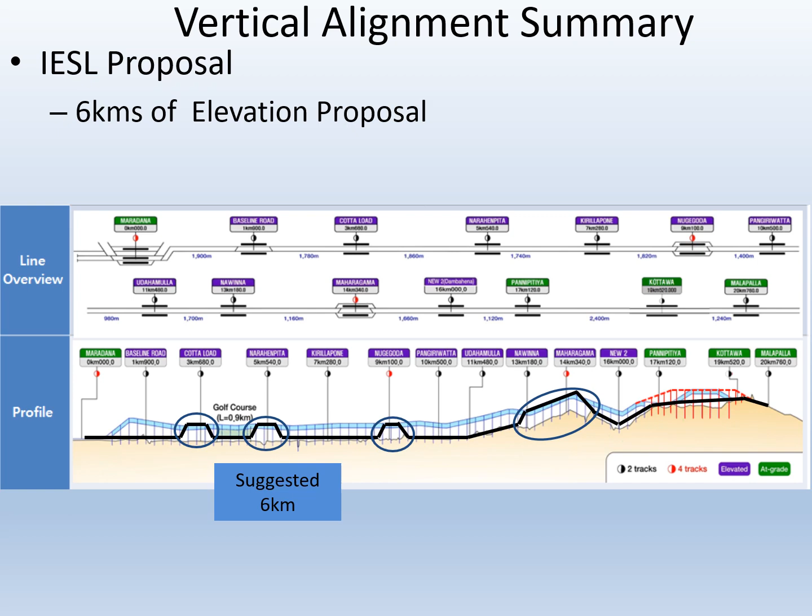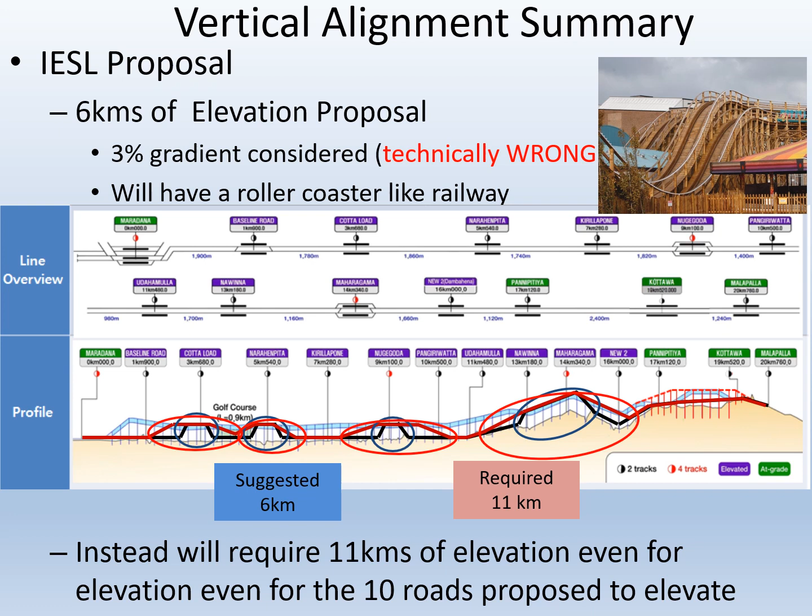To summarize the vertical alignment option, IESL proposed that instead of elevating the full length, only 6 kilometers can be elevated, with the profile shown below. We found that it was technically flawed, with a 3% gradient being considered, which would have made it like a roller coaster railway. We also found that instead of 6 kilometers, it will actually require 11 kilometers for a technically correct design, but that will create many more problems, since only 10 road crossings will be addressed.

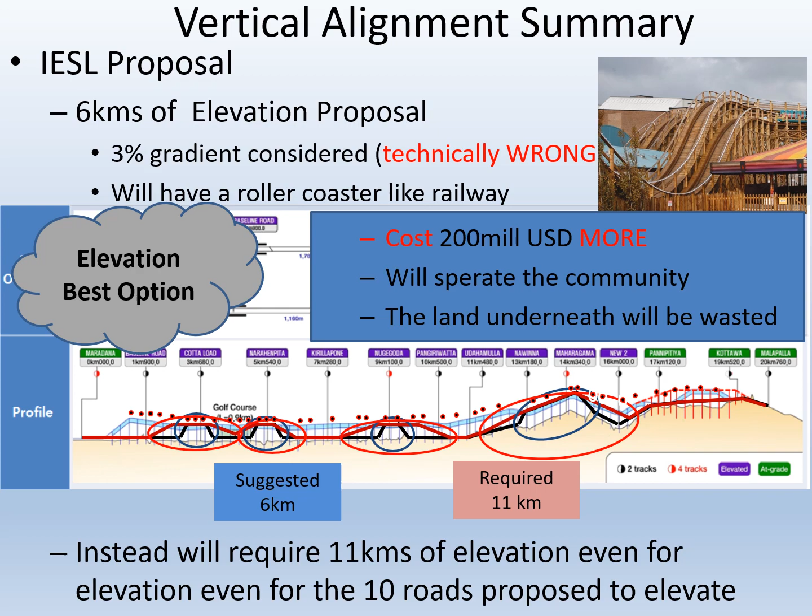We also found that their design would actually cost 200 million US dollars more. This will also require more land acquisition, and it will separate the community, and the land underneath will be wasted. When we consider a more scientific approach, we found that the best technical and feasible option, and the least cost option, would be going elevated.

Let's move on to the horizontal alignment. The presenter said that the new alignment will not have any curves straightened, that it will be like a serpent running across, and that with elevation it will never be able to straighten. What was not shared with you was that the curves are in fact straightened to some extent, to the degree that does not need additional acquisition. Second, he did not mention what would be the advantage or benefit of straightening. I will try to answer those questions.

It is obvious the best case scenario would be if the rail line is as straight as possible. In fact, the best alignment would be to draw a line between Maradana and Avissawella and start acquiring land, if land acquisition were not a problem. But that is not the case when alignments are selected. You need to consider multiple criteria such as cost, the speed gained, connectivity, acquisition, and social impacts.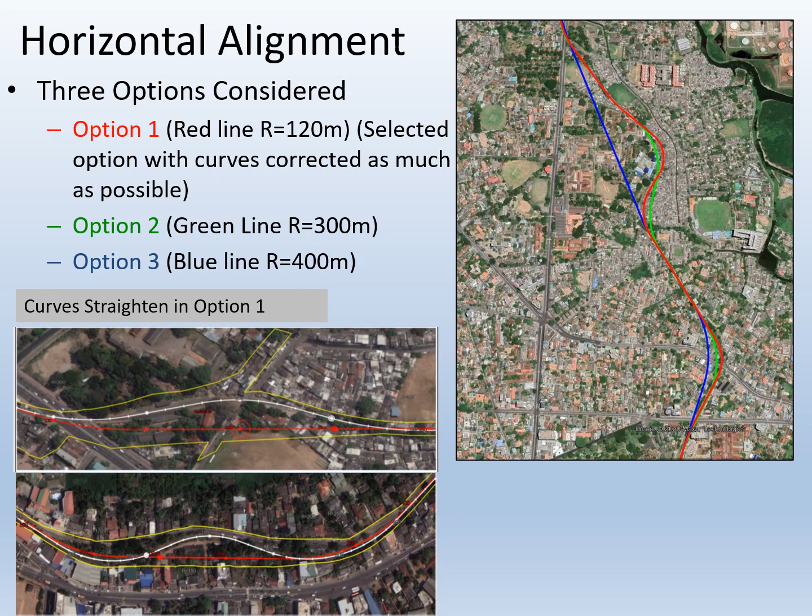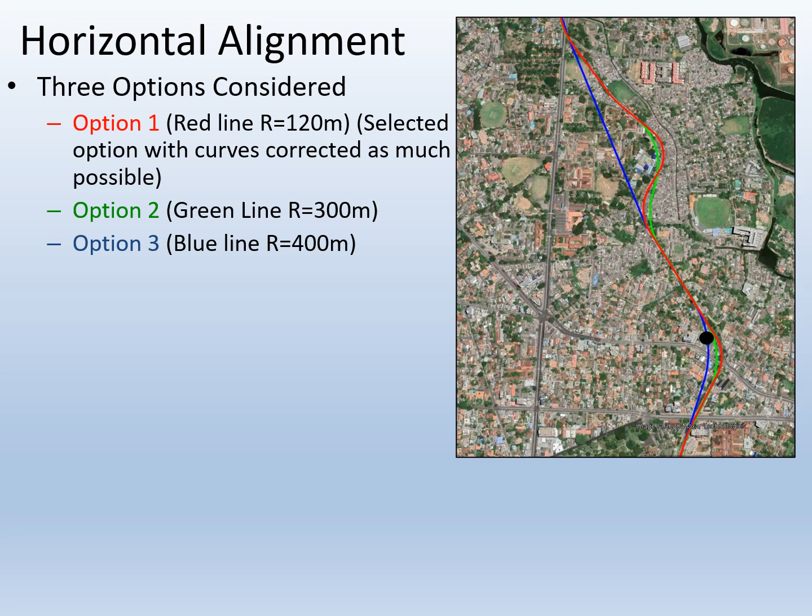Let's look at the second option. Option 2, shown in green, has curves corrected up to 300 meters. Option 3, shown in blue, has curves corrected up to 400 meters, which is virtually making it as straight a line as possible. As you can see, both option 2 and option 3 involve major acquisition, since the line goes through highly urbanized areas. I have heard people saying it is just a matter of acquiring encroached land, but you can see that is not true, and these statements are made to mislead people.

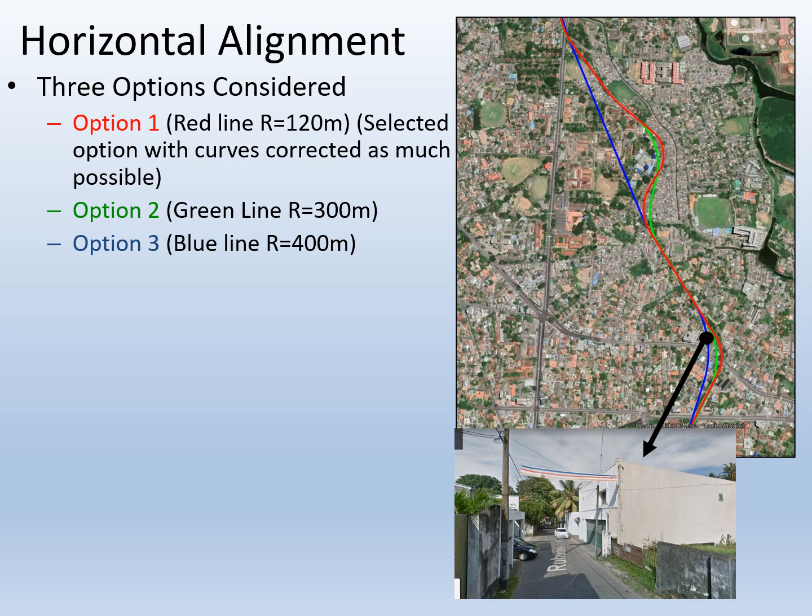If you compare the three options: option 1 can have a maximum speed of about 40 kilometers per hour in sections with 120 meter radius, option 2 can have a maximum speed of 70 kilometers per hour, and option 3 can have a maximum speed of 80 kilometers per hour. But option 1 will require about 29,000 square meters of acquisition, at a cost of around 8.5 million US dollars.

Option 2, on the other hand, will require 110,000 square meters of acquisition at a cost of about 32 million US dollars, and option 3 will need about 172,000 square meters of acquisition with a total estimated cost of around 50 million US dollars.

And mind you, this cost is only for land acquisition and will have extra costs for resettlement and other costs. So when you compare the options, you will see that there's no advantage in going to option 3 that straightens the curves by spending over 41 million US dollars more, because you don't get any benefit of the increased speed.

What you see is that option 1 will get you a time saving of about 26.4 minutes compared to now, and straightening will only get a time saving of 31.8 minutes. So virtually a 5-minute extra saving by straightening the curves by spending over 41 million US dollars, and with many inconvenience to public plus maybe lengthy legal battles.

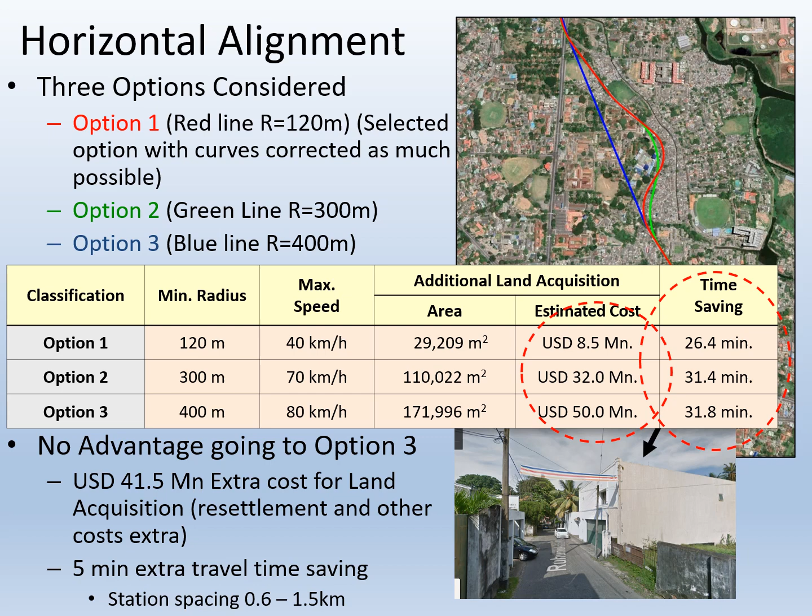There were mentions about freight movement as well, that by elevating we will not be able to transport freight. First, we need to see whether there is a demand now or in the future for freight in this line. What we found from studies is that there is no such demand. In fact, there is only 2% of total freight handled by railway at the moment, and 98% of that transport by rail is cement inputs and oil products.

Anyway, up to Homagama, there is no demand for container movements, and if it does arise, short-haul container movements through rail are not economical anyways. Further, if a need arises, the current design allows container movement along the elevated section. That should not be any restriction to carry parcels delivered at the moment as well. Further, there is no need to elevate the containers up to the elevated structure. If required, facilities can be provided to access the container yards if necessary.

Further, long-haul freight movement to Avissawella is planned through a new line proposed through Kelaniya, Kosgama and Avissawella.

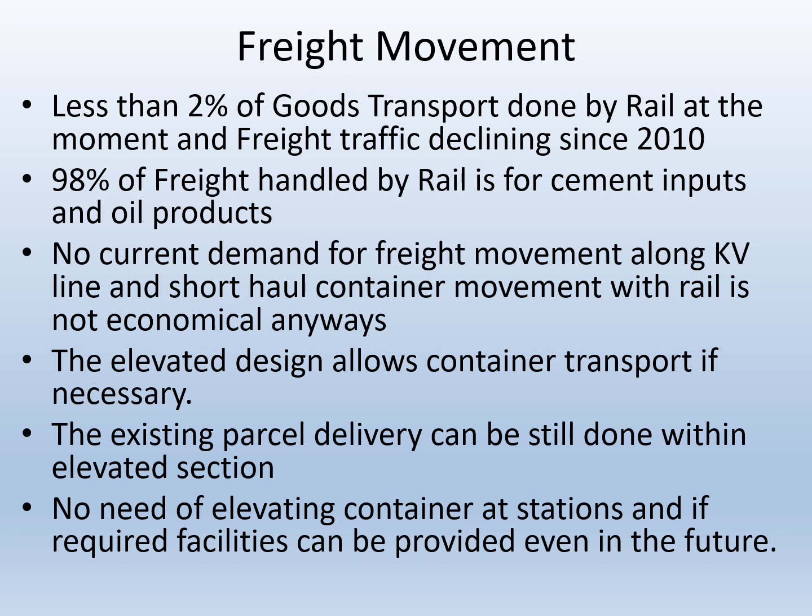In conclusion, I have explained to you the misinterpretation behind the story of multiple feasibility reports, and would like to confirm that there's only one final feasibility report submitted in April 2019. I have also explained how the presenter misinterpreted and misinformed you about the project cost. I have also explained how he has misinterpreted the demand numbers and explained to you the reasons the numbers have changed based on alternate scenarios.

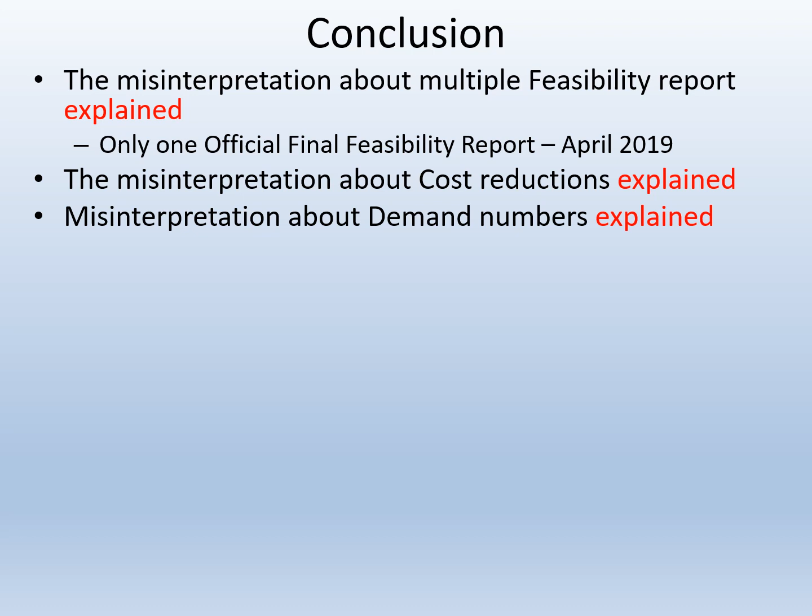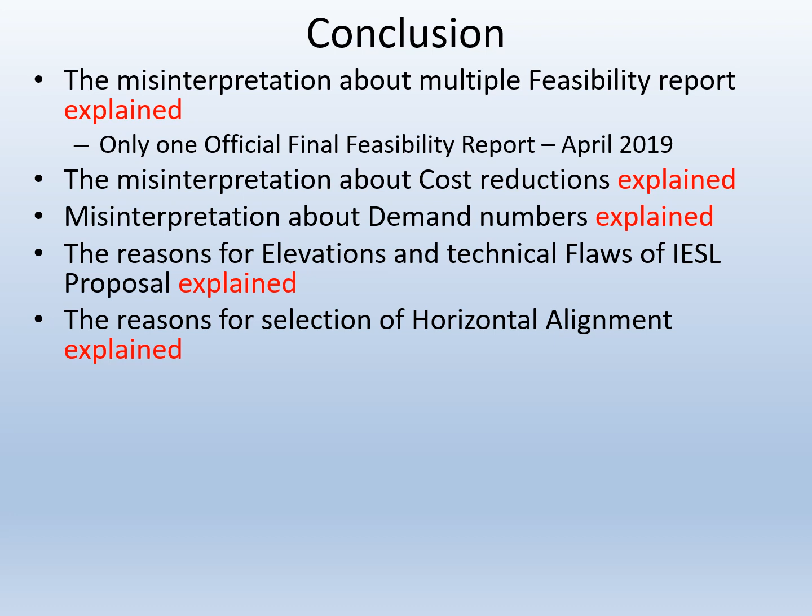And I have shown the inconsistency in the past work of the presenter who is accusing for the demand. I also explained what the consultants have considered for the vertical alignment and the decision on elevation of the track, while highlighting the technical flaws of the alternative proposed by IESL and that their proposal would cost $200 million US extra. I have also explained the option considered for horizontal alignment, and the reasons for selecting the current proposed alignment.

Unfortunately, what I have explained to you have been explained to the presenters and the IESL Transport Committee since January 2019, over and over again. My question to you is, if they had listened without prejudice and were able to understand the justification given, why does this group keep on repeating the same thing over and over again?

How ethical was it for them to make a confidential document public, disregarding code of conduct of being in the steering committee? How ethical is it for them to go and write to the ADB? And in the first instance, it was their steering committee member who did not attend the steering committee meetings when these crucial decisions of elevating - that is the vertical alignment or the horizontal alignment and the cost - all these were discussed.

Can a group who had objected and tried to sabotage the expressway construction, and even held a workshop the day before opening of the expressway with similar lobbying, be trusted? I think history is repeating now in the public transport side of the transport sector. Can there be any other motives behind this continued lobbying, where a group, when they are not involved in a project, comes and makes this kind of lobbying?